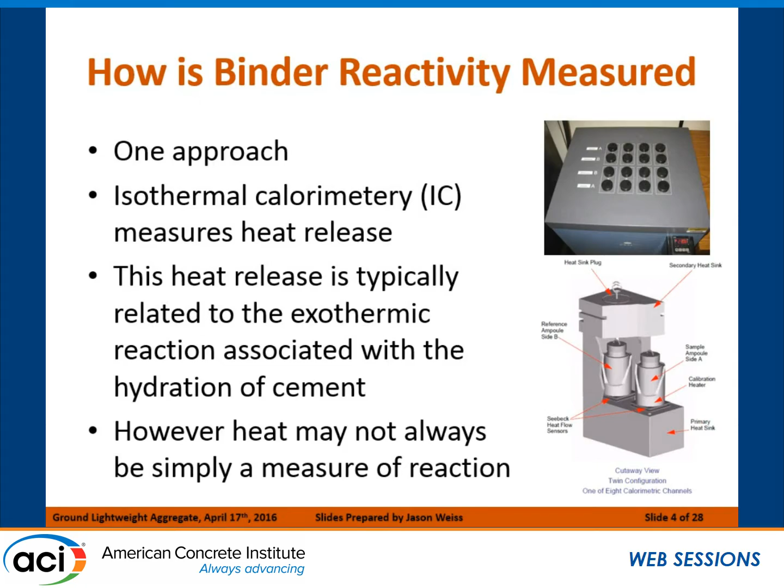Now, this is a plot that comes from Igor de la Varga, who's in the room hiding out behind a beard back in this area. This was some work he did where we were looking at high volume fly ashes, using a lot of fly ash to replace cement.

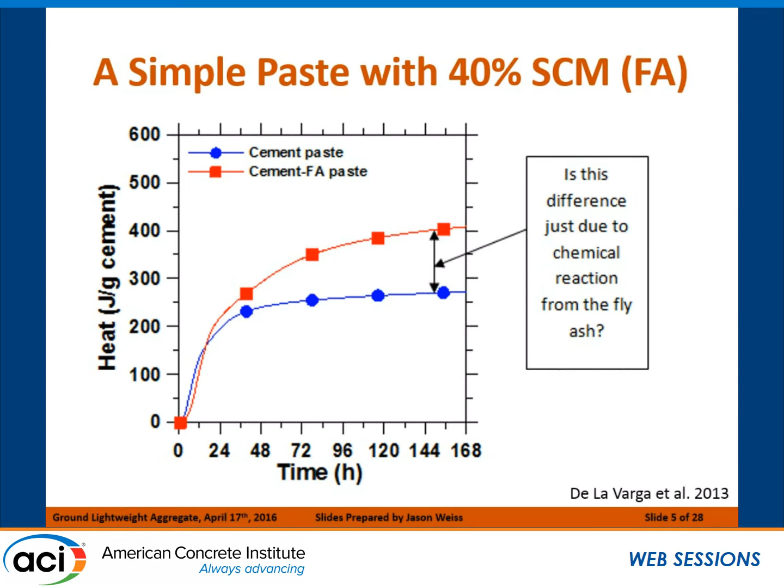If you looked at these, you would say, well, here's the heat released per gram of cement, so this whole difference here must be the reaction of the fly ash itself—essentially the pozzolanic reaction kicking in, and it's this huge amount. But if we took it a step further, he was able to show there's a lot more to this, and a lot more going on.

We have different reactions going on and different forms of heat being released, but we also have particles doing different things. Some particles are reacting, some are providing a place or surface for reactions to occur as nuclei, some things are going into solution, and sometimes the dilution effect just gives everything else a little more room to stretch out, do its thing, and react.

So really the whole idea is we're looking at systems with a bunch of different things going on when we just start replacing some of the powder.

Here you can see some work that was done with Igor and Dale Bentz, where we used the NIST hardcore soft shell model. The basic idea here is this is where you have just pure cement—you see all the little red balls representing the different size particles of cement.

But when you start replacing 40% of the system with an ash or a filler, you see the same particles appearing in there because we've matched the particle size distribution, but now they're going to react at very different rates, and that's going to have a very different impact on overall performance.

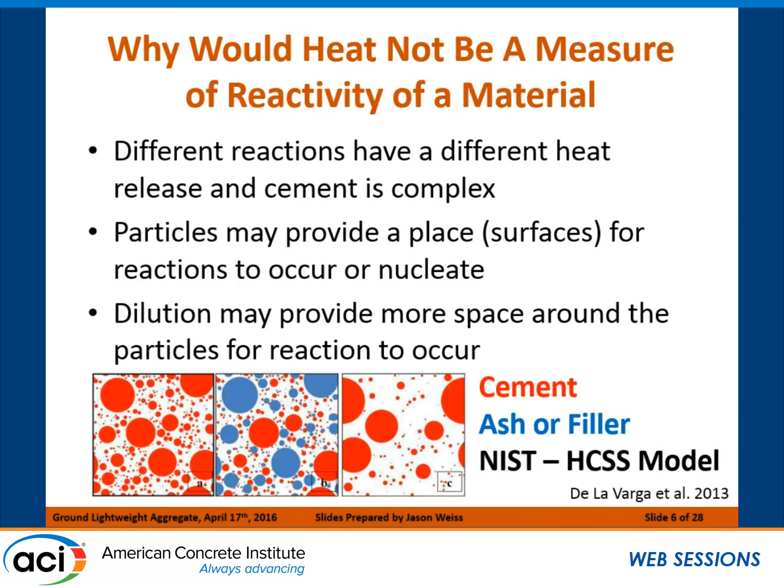Now if you take the filler out or take the ash out, you have a system that's effectively got a lot more room, and you're going to have differences in reaction. The whole idea behind this was that we could tailor systems where we could actually start to look at it.

A typical 0.3, shown here in blue, is the system where we had fly ash, shown here as M2 with the dark line, but then two cases where we essentially put in a quartz filler, and a case where we simply remove the filler—we're able to see that in each of those cases we have a different overall heat release.

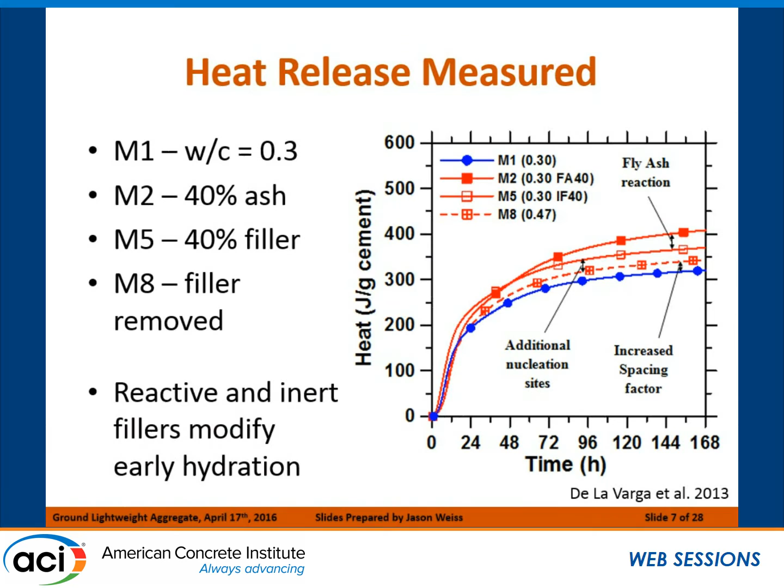What we're going to do is look at this and say, oh, that's the real data, but then we're going to interpret that data on the next slide and say, well, all of this difference here is not simply due to the reaction of the fly ash.

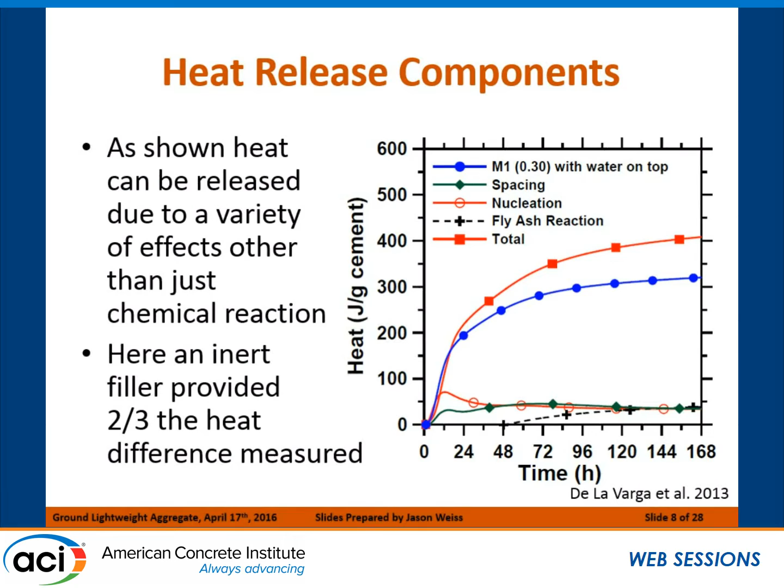We have additional things going on here. Part of this is the green, the effect of increased spacing, which gets us about a third of that overall heat from more room for particles to react and hydrate in the system. We've got the nucleation effect, about a third of the total heat released, and then about a third is the overall fly ash reacting in the system. So while we saw a massive change in hydration, only a third of that is really due to the reaction of the fly ash itself, where two-thirds is coming from other sources inside the system.

So the question was, can we start to look at this and interpret it when we consider other types of materials and binders in the system. The two materials we're primarily going to look at here are limestones, whether we're using a Portland limestone cement or using the limestone as a filler.

In this particular case, we don't expect a lot of reaction with the calcium hydroxide. We may have some reaction with the aluminates, and more importantly, we may get calcium dissolving into the system and changing the pore solution composition.

We also wanted to look at ground lightweight aggregates. One reason is we hear people saying we don't have enough fly ash and we need the effect of that supplemental material. We can't get consistent fly ash, so this is a question of whether there's a possible other source out there.

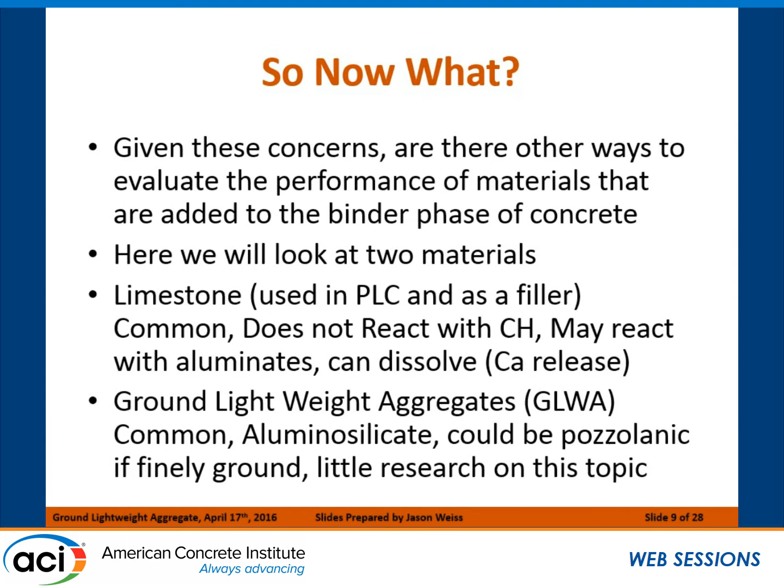The ground lightweight aggregates are essentially common. The smallest pieces, or the powder, the dust of this, is something that's readily available. It's an aluminosilicate, and it can be pozzolanic if it's ground to the right size. This is really what we wanted to start looking at.

Just a reminder of these two different systems we'll be looking at. One is the Portland limestone cement system, where we've done a lot of work, with a typical OPC system having about 4% limestone ground in. The limestone is shown in yellow.

When you look at this, you'll see it's 4%, there's a limestone, there's a limestone, there's a limestone. The big thing to notice is that when we're intergrinding the limestone, it's very, very small - a much smaller particle size, which also impacts the overall size of the cement inside the system.

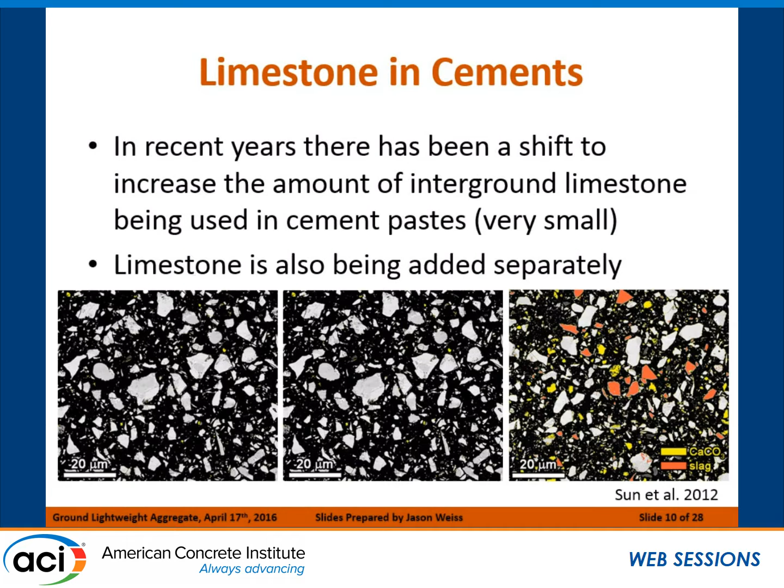When we look at a full blended system, we can see both the 15% limestone shown here in yellow, and 20% slag shown in orange throughout the system. We'll be talking about the effects of intergrinding, but we need to remember that when we intergrind materials, we get very different size distributions, and the limestone is typically very, very fine.

The ground lightweight aggregate is made from an expanded shale, slate, or clay. The material is heated to bloat it up - the idea of making lightweight aggregates is to capture gas inside the material as it heats, making it more lightweight, but you end up with a lot of fine powder at the end. What you can't use for aggregates - the question is, can you use this as a ground supplementary cementitious material?

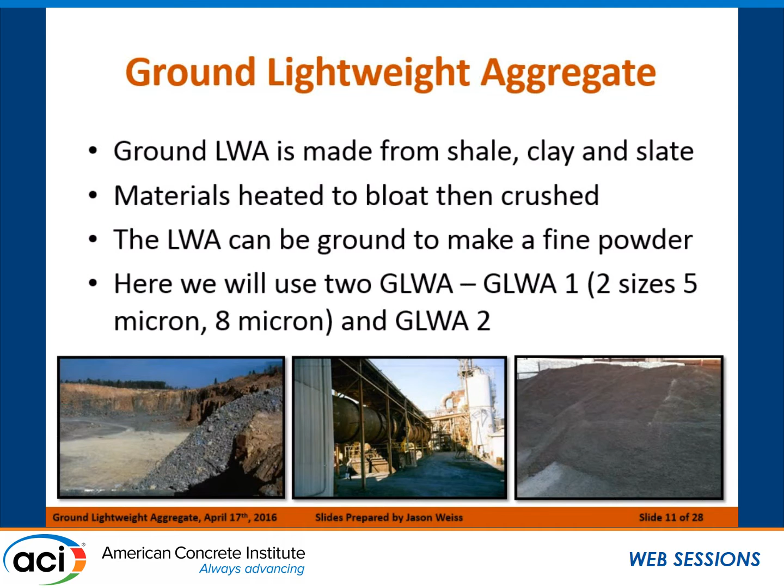The idea here is we're going to look at an average 5 micron particle size and an average 8 micron particle size with two different lightweight aggregate chemistries. We're going to go through a testing process looking at all these different materials - cement, fly ash, quartz as basically an inert filler, limestone, the ground lightweight aggregates, slag - and we have a lot of additional characterization that, because of time, I'm not going to get into.

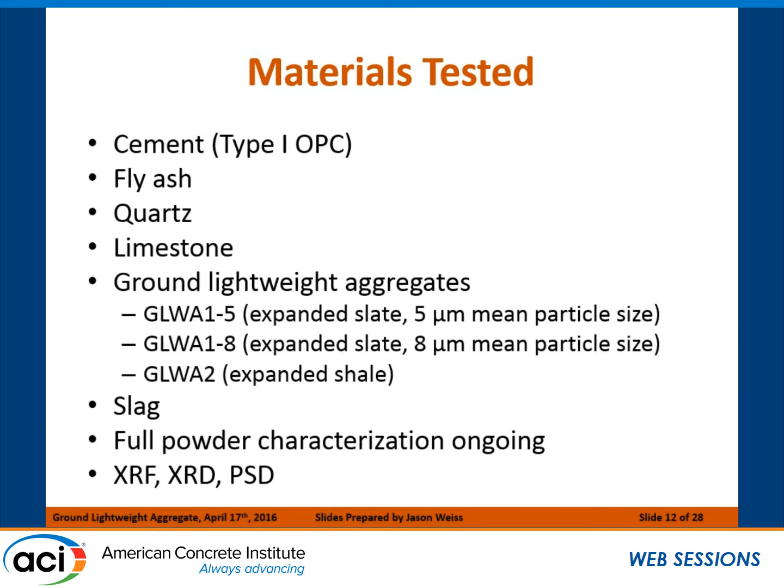We can take the derivative of that and get the rate of heat release, and now all of a sudden we can see sort of the same things that Scott was talking about earlier with accelerations that are happening when we get finer particles, but it really leaves us with an incomplete understanding of what's happening in the system.

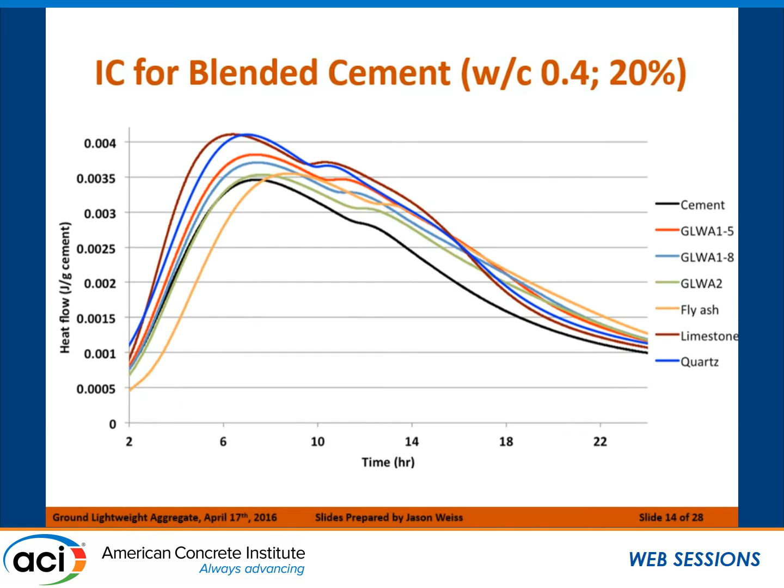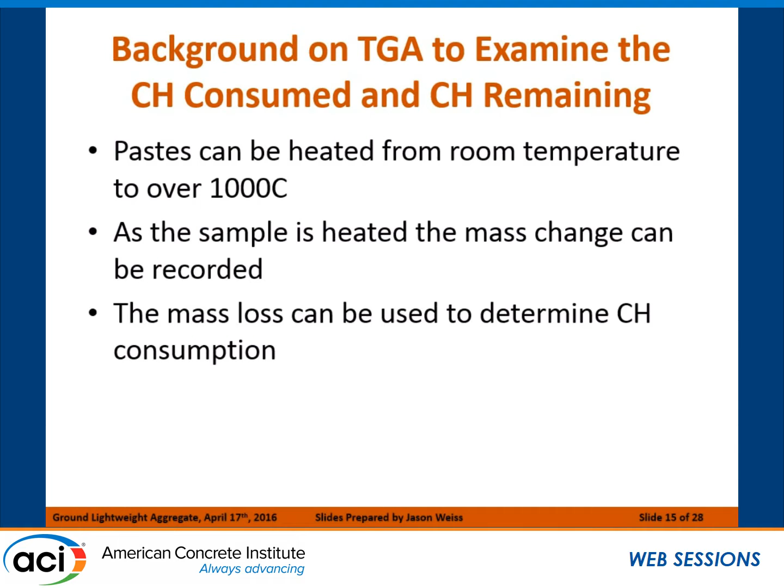The other thing we could do is bring in thermogravimetric analysis, where we take these pastes and heat the hydrated paste from room temperature to 1,000 degrees, and we can essentially measure the mass change and use this to determine the amount of calcium hydroxide that's being consumed.

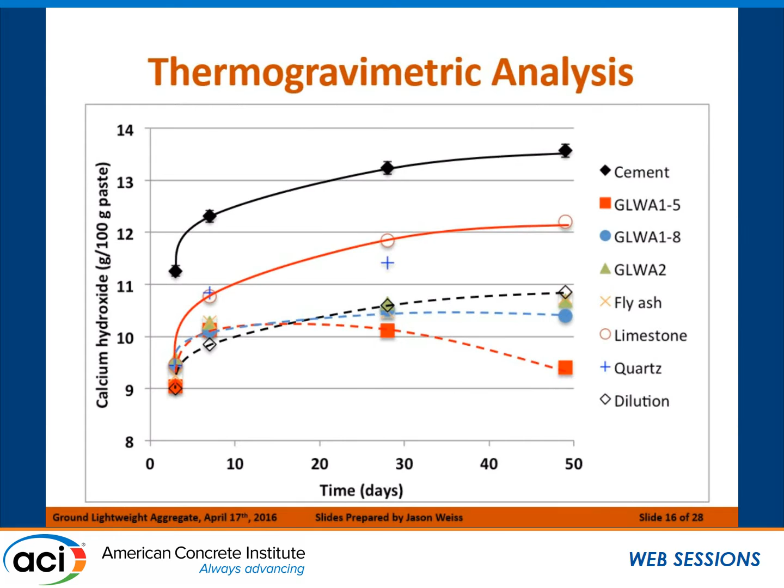Trying to separate these curves out can become really tricky, especially when you're trying to figure out how pozzolanic a particular source is. I'll show you an application at the end where not only how pozzolanic the material is, but how much calcium hydroxide it consumes, is very, very important when it comes to some durability-related problems.

So what I would like to argue here is that isothermal calorimetry on its own isn't enough, and there are some alternatives that we can really look at.

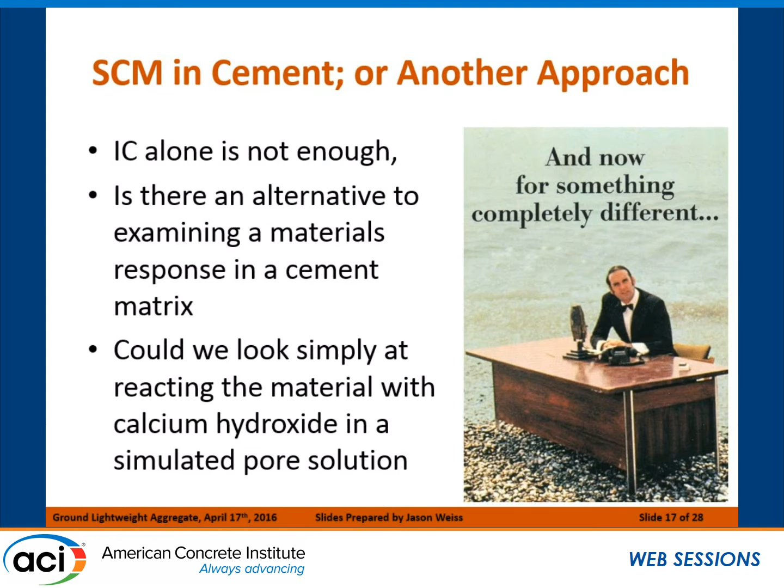One of the things we've started doing is some testing where we're simply looking at testing calcium hydroxide with a simulated pore solution with these different materials, using this as an indicator of the reactivity of these materials, which may be much faster and a much simpler test to go with.

So the whole idea here is we're going to take these raw materials, place them in conjunction with calcium hydroxide, alter the pH to simulate what a pore solution chemistry would be, and use a slightly higher temperature just to try to accelerate the overall reactions.

So the whole idea here is we're going to mix the calcium hydroxide, the lime, together with a supplemental cementitious material, and then a 0.5 molar potassium hydroxide solution. We're going to do this at 50 degrees with a relatively high water to solids ratio.

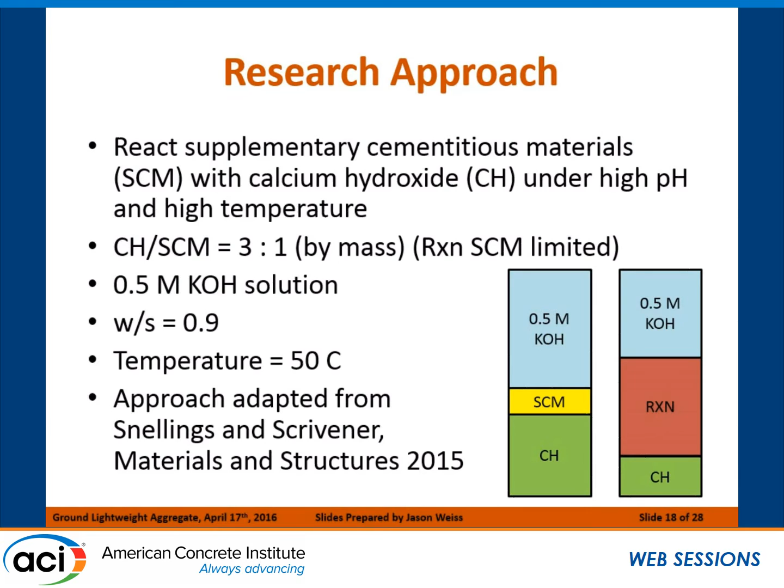The whole idea here is that what we're trying to do is make sure there's plenty of calcium hydroxide there to react with the supplemental cementitious material. So when this becomes completely exhausted, we've reacted all of the SCM and we have leftover solution and leftover calcium hydroxide. So now if we run this through isothermal calorimetry, we get a very different picture of what's going on.

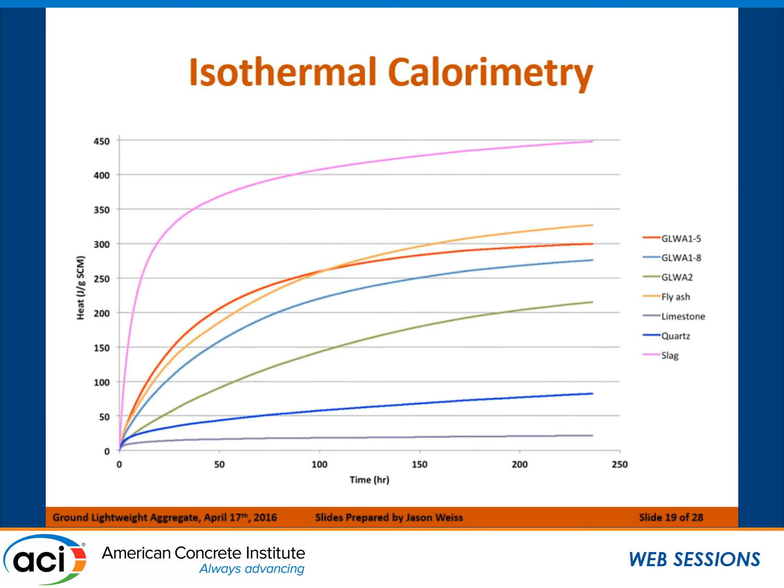Here we can see what happens when we add slag to the system. Here we can see some of our ground lightweight aggregates. Here we see our fly ash, our quartz, which was surprisingly not exactly zero, but slightly above there. And then we can start to see the limestone, which is this purple fella down here.

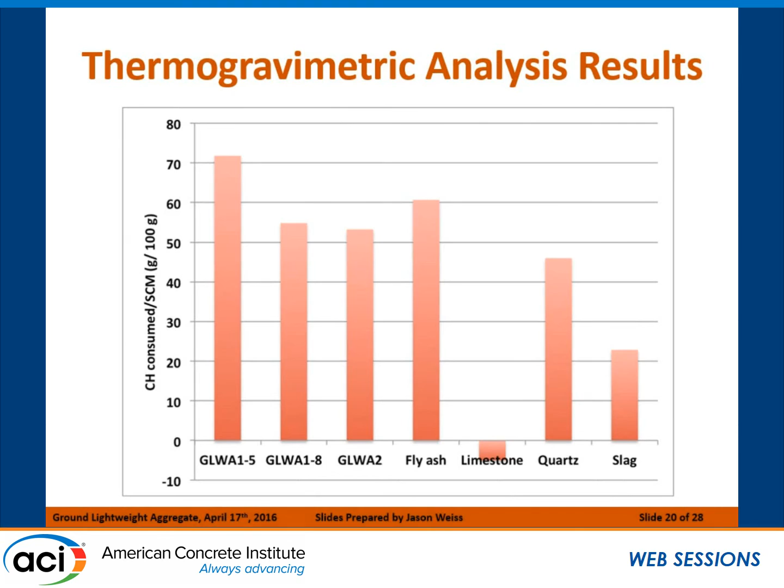And in a real system, this is because it's hydrating more. In this particular case, we think it's because there's a bit of dissolution going on, and then the material is reforming with some of the pore solution.

One of the things I found very interesting, and this was really something Pranoy came up with, and I want to make sure he gets full credit for this, is Pranoy said, if we start plotting these things onto a very simple plot, we can start to get a much better understanding of what these materials are doing. You'll all probably be much quicker than I was at this. I spent about 30 minutes at a meeting scratching my head trying to figure out how this simplifies what we're doing, but I think this is an incredibly powerful way to look at the overall data.

Essentially, if we plot heat released at a particular age versus the amount of calcium hydroxide reduction, as we go further up this graph, we see more typical hydration reactions—more heat being liberated. Alite's going to be somewhere up here in this 450 to 500 range. Belite's going to be somewhere in this range over here. And as we move toward the right-hand side, we're going to see more pozzolanic reaction taking place in the system.

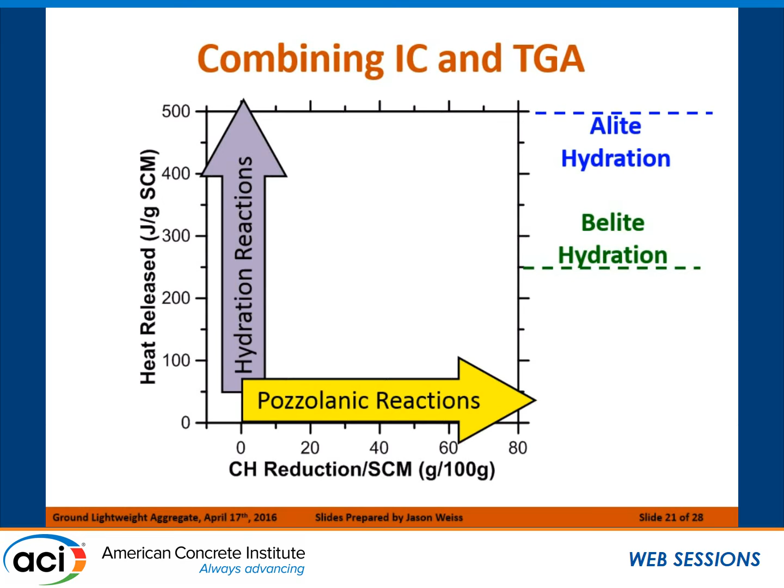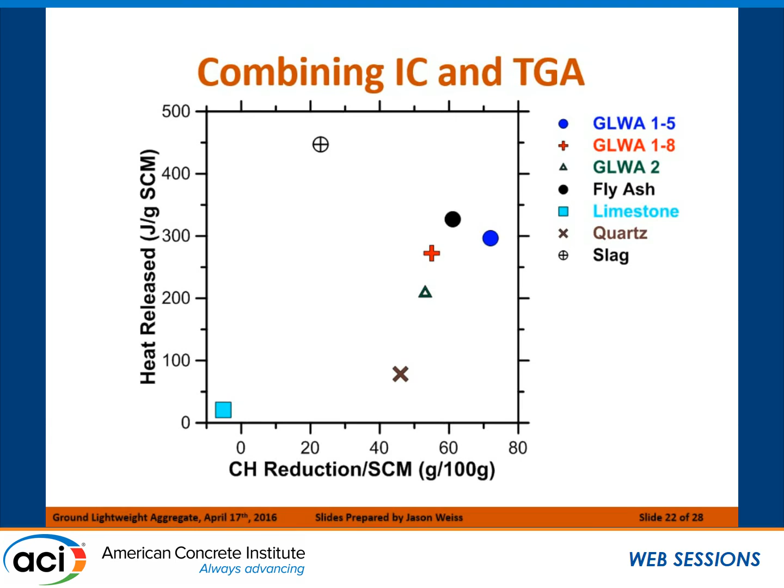So if we look at the heat coming out of each of these tests, we start to see a plot that looks something like this, where we see limestone down here, slag up here, our quartz, and then our fly ash, which is this one, and then our three lightweight aggregates here.

The very interesting thing is when you start looking at this plot, all of a sudden you can start looking at these and saying, we can classify these different powders based on where they fall on this diagram. Something staying here close to zero is a very non-reactive material—non-reactive in terms of pozzolanic or hydraulic reaction on its own. That doesn't mean it's not important in the overall system, doesn't mean it's not going to change the performance, but the limestone on its own is not what's reacting.

We can look over here and say slag—we know that's got some of its own hydraulic capacity to it, very high heat release versus a relatively low amount of calcium hydroxide change. And then all of a sudden we can see the quartz may have some effect here, but really a lot of calcium hydroxide, low heat.

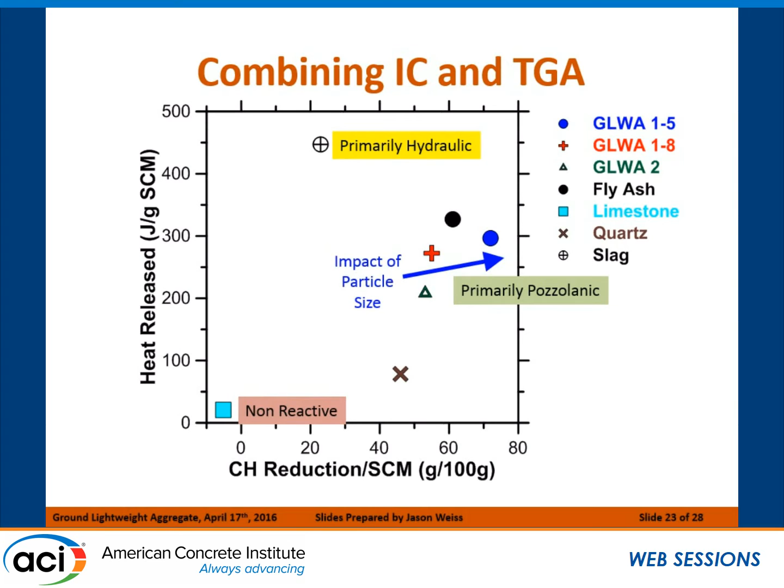And then all of our pozzolanic materials sort of fall into this nice cluster here, where as we start to change the particle size, we move a little bit over to the right-hand side, likely because we're not at complete 100% reaction. This is one of the things we're really working on, to figure out how much of the products are left when we're all done.

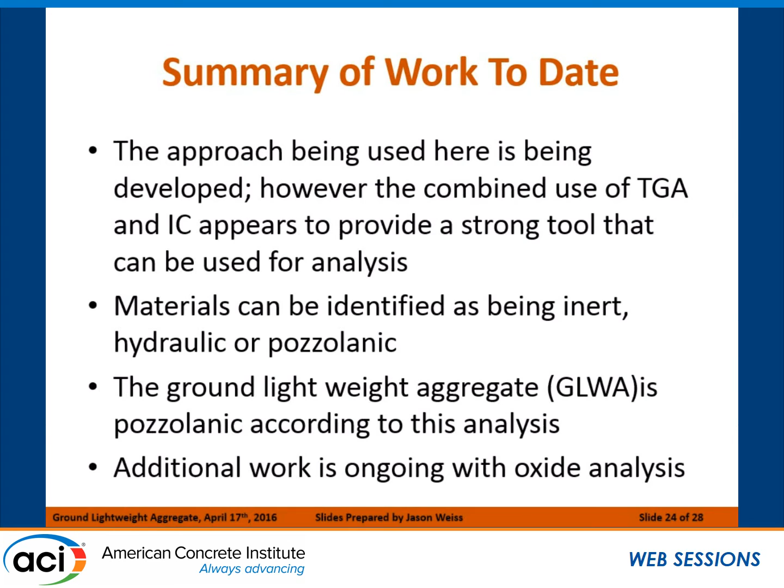So if we summarize where we've been up to this point, the approach we're developing here is really looking at TGA plus isothermal calorimetry to provide a strong tool for this analysis. This enables us to identify materials as inert, hydraulic, or pozzolanic very quickly. The ground lightweight aggregate is incredibly pozzolanic when we look at this, and this leads us into a great potential application for these pozzolanic types of materials.

One of the things taking place is when cements are exposed to calcium or magnesium chloride, there's a potential reaction that can take place. We've got the calcium hydroxide, our CH, we've got our calcium chloride, we've got water. If we react these together, with the de-icing salt coming in, we're going to produce this critter called calcium oxychloride. And you may be sitting there saying, exactly, calcium oxychloride, that's what I hoped we would get. Right? This should keep all of us up, scared tonight, cringing, hiding under the bed.

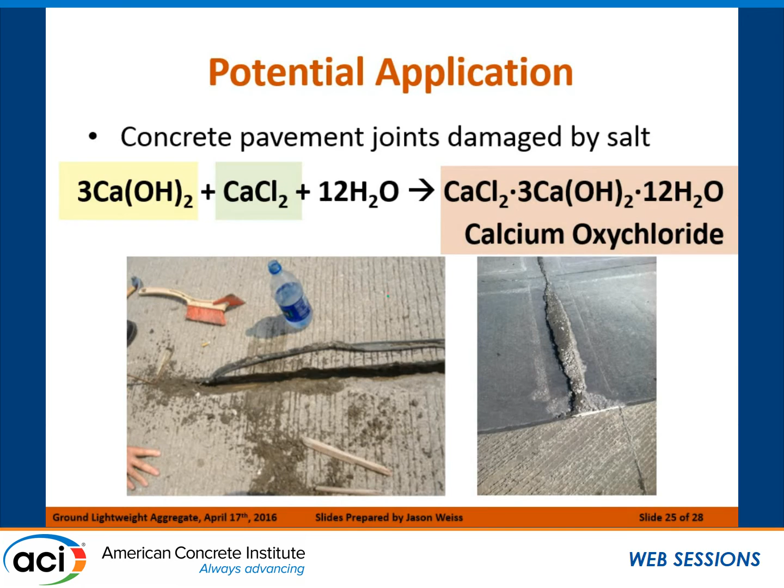But the big benefit you get when you start using a pozzolanic material is you start consuming that calcium hydroxide additionally because of the pozzolanic reaction. So in addition to just not having the calcium hydroxide there, we're gobbling it up so that it's not free to react with the chlorides when they come into the system.

So one of the big questions is the age-old question of how low can you go, or how low do you need to go, where this doesn't become a big problem. Right now we're saying around 10% seems to be a good number, what people are seeing in the field where they're not having problems. But this is something we really need to continue working on to see where that number needs to be.

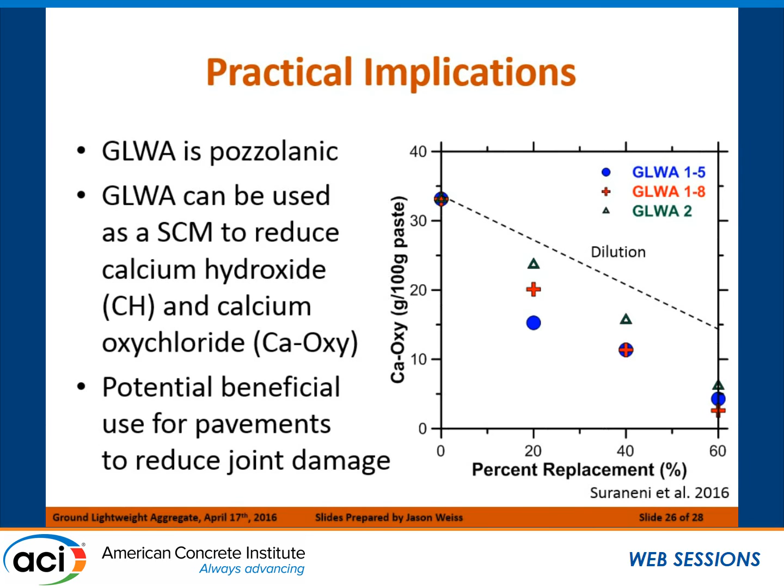What we do know now is that the addition of SCMs, fly ash, silica fume, ground lightweight aggregate, anything else that's going to react to consume the calcium hydroxide, is good at minimizing this joint damage.

So in conclusion, ground lightweight aggregate has the potential to be used as an SCM. We've talked about a new approach that combines isothermal calorimetry and TGA to quantify the extent of pozzolanic reaction that occurs and to really start distinguishing between materials. The ground lightweight aggregate, as well as fly ash and several other pozzolans out there, have a real practical implication to be used in the F3 exposure condition according to ACI.

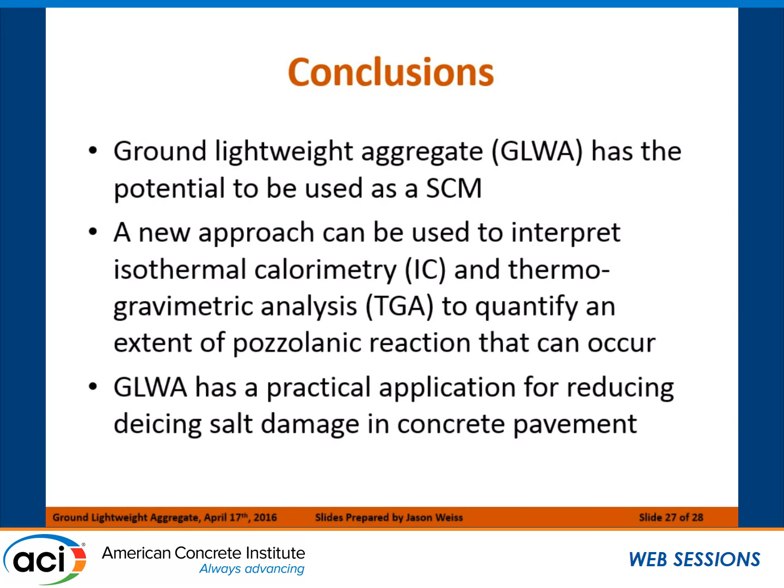And in fact, we should be promoting the use of these materials when we're using de-icing salts because they're going to improve the overall performance of the concrete. With that, I will either start making up 4-letter codes for Eric, or I will try to answer some questions.

Jason, did you test your raw material, pulverized, the shale, before going through the calcination or heating process? We have not tested before going through, but that's something that's on our list to take a peek at. Right now we're trying to use kind of an industrial waste, but it would be a great thing to look at. Any implications of this work for scaling resistance?

Yeah, the tricky part of this is scaling is going to be much harder nut to crack with just this. I personally think scaling is kind of wrapped up in this, but in addition, the scaling issue has a lot to do with placement because a lot of the lighter particles float, and our experience has been it's very difficult to make a concrete with a low slump that scales. It's really easy to make a concrete with a 5-inch or 6-inch slump that scales, mainly because we see preferential amounts of fly ash or other pozzolans on the surface. This is something we will be looking at, but there are implications into what's going on in those cases.

Did you have to adjust mixture proportions because the lightweight aggregate absorbs a lot of water? So in these, what I would say is these are ground lightweights, so they get down to 5 microns. At that size they're really almost a completely solid material. They have a very low porosity. We've essentially ground all the holes out of them, if we think about it.